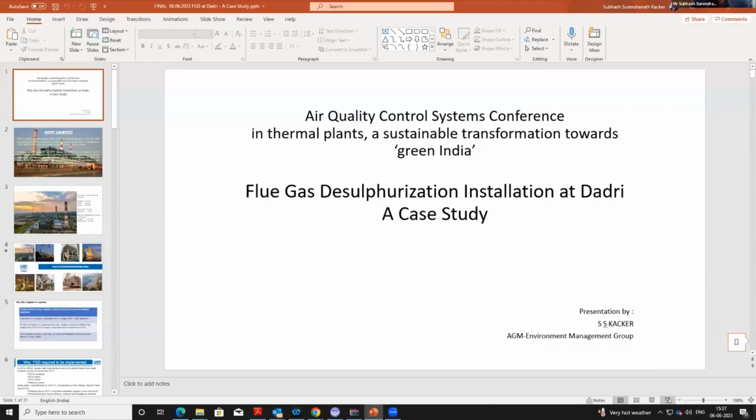Thank you, sir. Thank you, Tyagi sir. Thank you, Shreyal ji. I hope my presentation is visible to you. Yes, it's visible. You could go to slideshow mode. Perfect. So I'll talk about flue gas desulfurization installation at NTPC Dadri.

NTPC Limited is one of the largest power utilities in the country with an installed capacity of more than 72,000 megawatts, and it plans to become a 130 gigawatt company by the year 2032. It was established in 1975 and aims to be the world's largest and best power major.

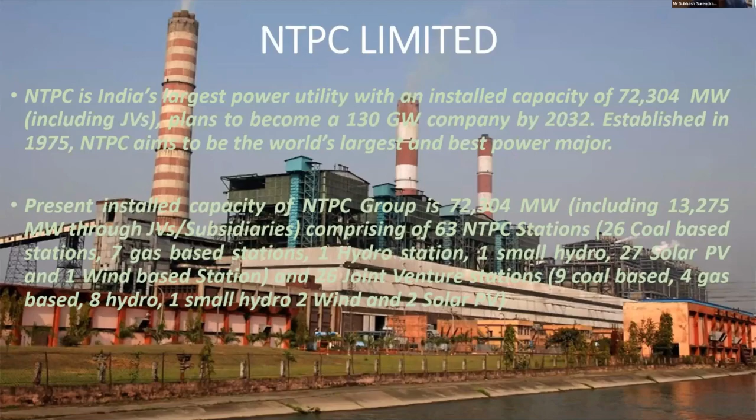As on date, the installed capacity of NTPC Group is 72,304 megawatt, including JVs and subsidiaries. We have 63 NTPC stations: 26 coal-based, 7 gas-based, 1 hydro, 1 small hydro, 27 solar and 1 wind-based station. We also have 26 joint venture stations: 9 coal-based, 8 hydro, 1 small hydro, 2 wind and 2 solar PV.

NTPC Dadri is a thermal station of 1820 megawatt, with stage 1 of 840 megawatt. This is the old station, commissioned in 1993. We have stage 2, with 2 units of 490 megawatt, total capacity 980 megawatt, commissioned in the year 2010.

We also have one gas plant with 4 gas turbines, total capacity of 829 megawatt, and solar PV of 5 megawatt. So Dadri is a unique station having thermal, gas and solar PV in one premises. Total ash generation is 24 lakh metric ton, fly ash is 19.2 lakh metric ton, and bottom ash is about 4.8 lakh metric ton.

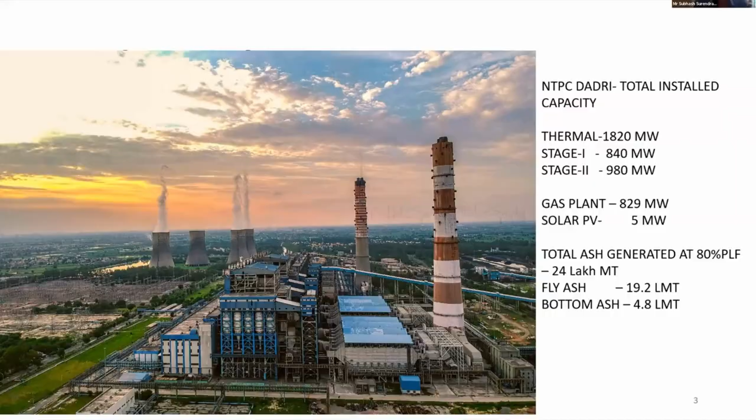So let's talk about flue gas desulfurization. Combustion of fuel having sulfur results in sulfur dioxide emission. Coal with 0.5% sulfur generates SOx in the range of 1500 to 2000 milligram per normal meter cube, with 95 to 96% of the sulfur converted into SO2. Indian coals have very low sulfur content, only 0.25 to 0.5%, while imported coal has more sulfur content, leading to more SOx generation. SO2 emission results in acid rain, corrosion of buildings and structures, and also affects human health.

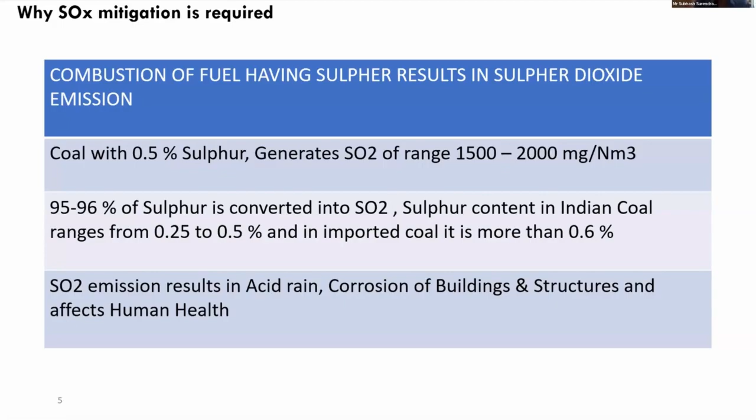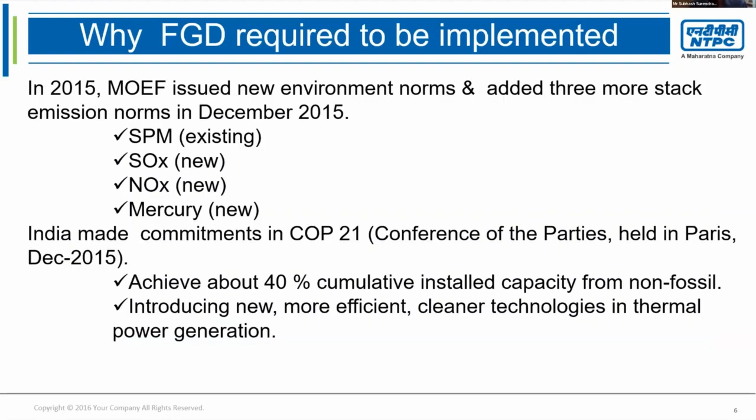In 2015, MOEF issued new environment norms and added 3 more emission norms in December 2015. India made commitments in COP21 in December 2015, wherein we said we will achieve 40% cumulative installed capacity from non-fossil fuels, introducing new, more efficient, cleaner technologies in power generation.

So regarding new stack emission norms: for stations installed prior to 31/12/2003, where NTPC stage 1 units fall in this category, the particulate matter limit is 100 milligram per normal meter cube, SOx is 600 milligram per normal meter cube, and NOx is 600 milligram per normal meter cube.

While for TPPs installed after 2003, where our stage 2 falls in this category, PM is 50 milligram per normal meter cube, SOx is 200 milligram per normal meter cube, and NOx is 300 milligram per normal meter cube.

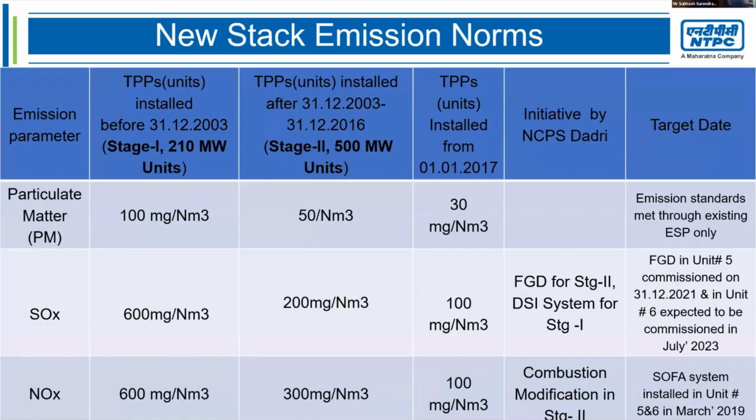For stage 1, we have installed DSI system, that is dry sorbent injection, and we have installed FGD for stage 2. For NOx control, we have gone for combustion modification in stage 2, wherein we installed the SOFA system in units 5 and 6 in March 2019. Dadri is the first plant of NTPC to implement DSI and FGD in a retrofit plant.

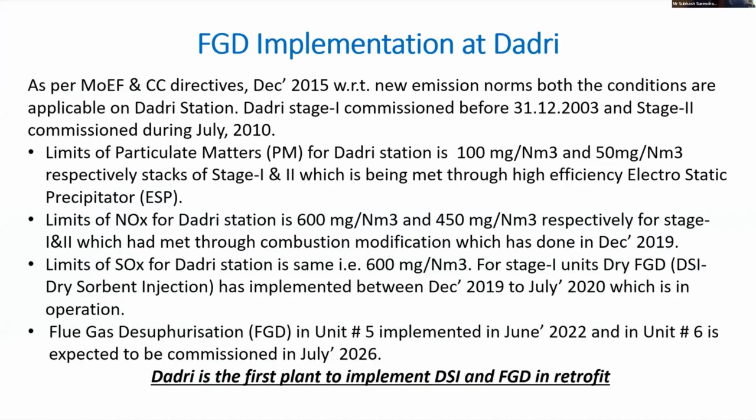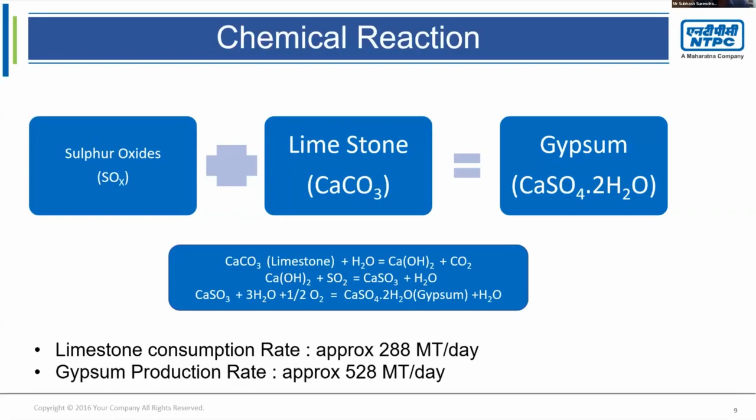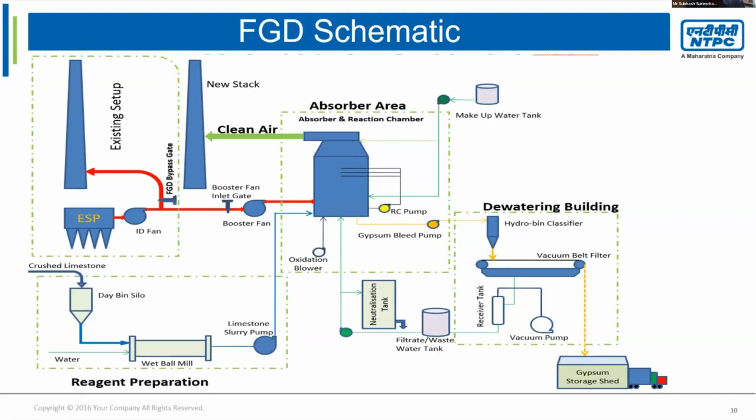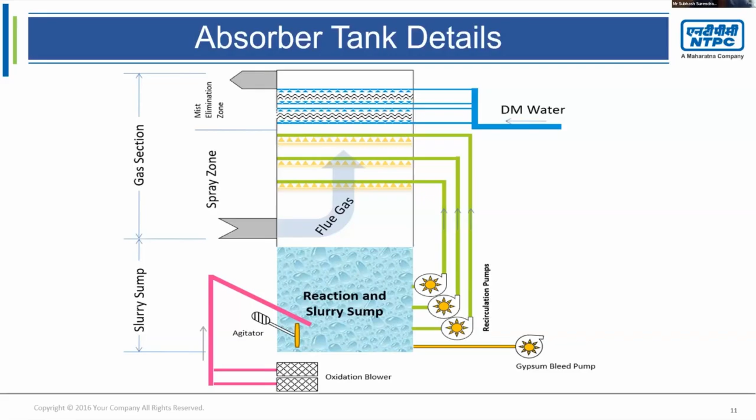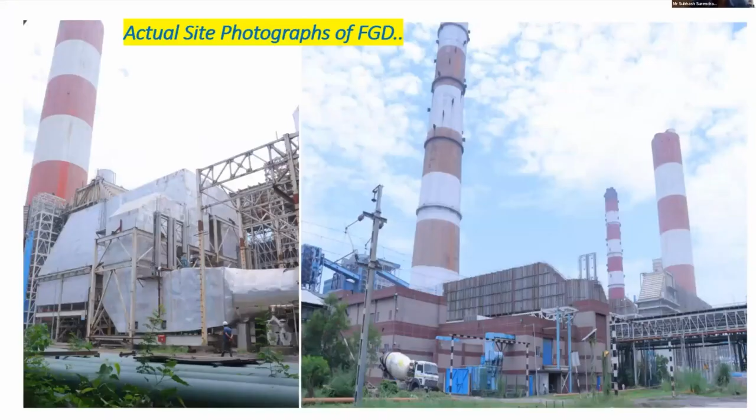This is an aerial view of the FGD. Earlier, we were having a high chimney. Now, with reduced emissions, the height of the new chimney has reduced. Though this is also a multi-flue chimney, the height has now reduced. This is the actual site photograph.

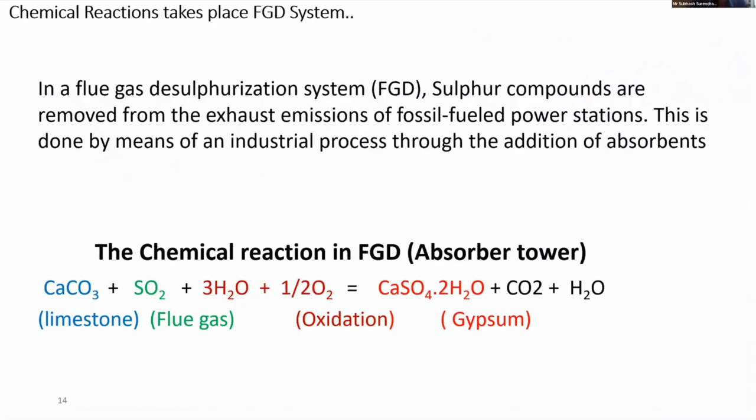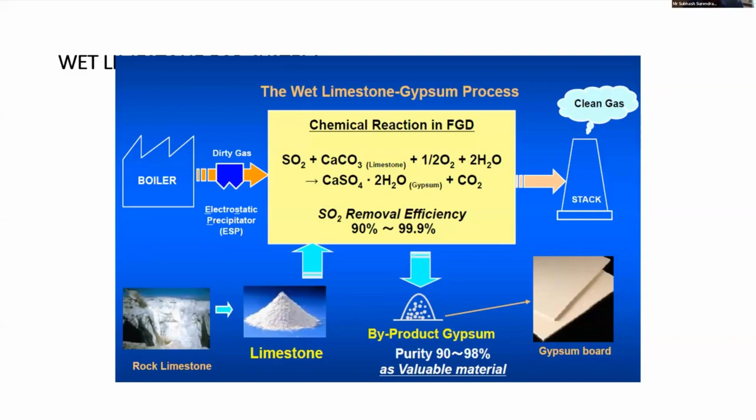Sulfur dioxide and limestone get converted to gypsum. This is the chemical reaction. Down below, again, we have shown the detailed chemical reactions which are occurring, and the limestone ultimately converts to gypsum in a series of 3 reactions.

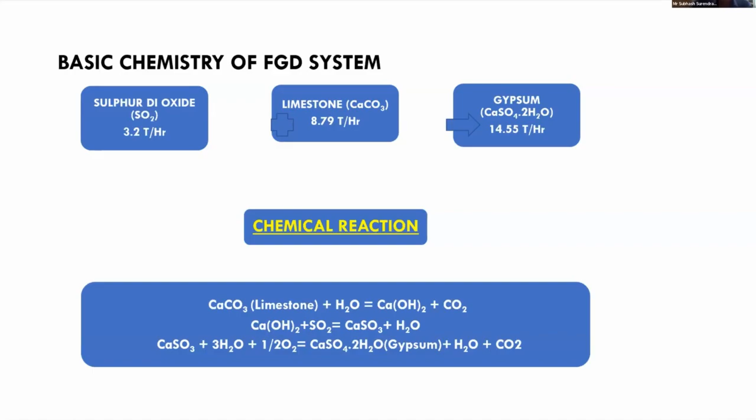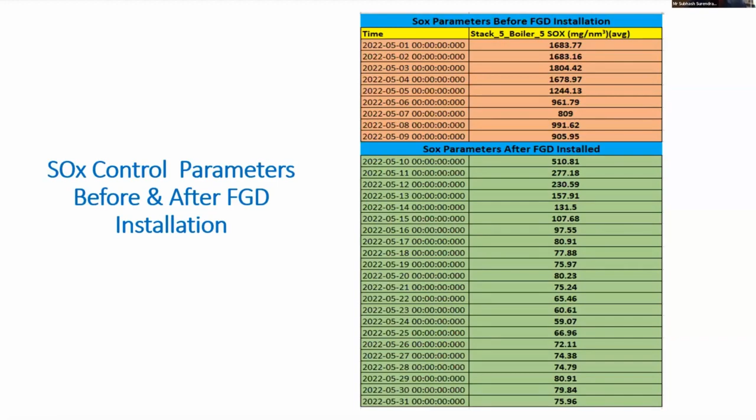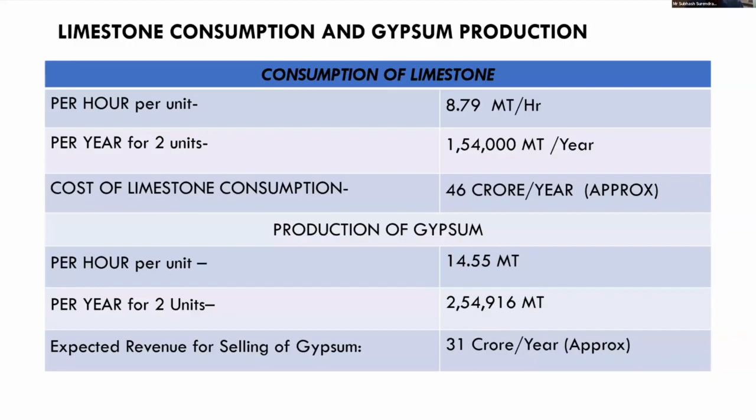Limestone consumption is about 8.79 metric tons per hour. For 2 units, the consumption will be 1,54,000 metric tons per year. Cost of limestone consumption will be about 46 crores per year, while the production of gypsum is about 14.5 metric tons. So for 2 units, since we have 2 500 megawatt units, we'll be installing this FGD for both. For one, it's already in service. For the other, it's likely to be in service in the next 1.5 months. Expected revenue for selling gypsum is approximately 31 crore per year.

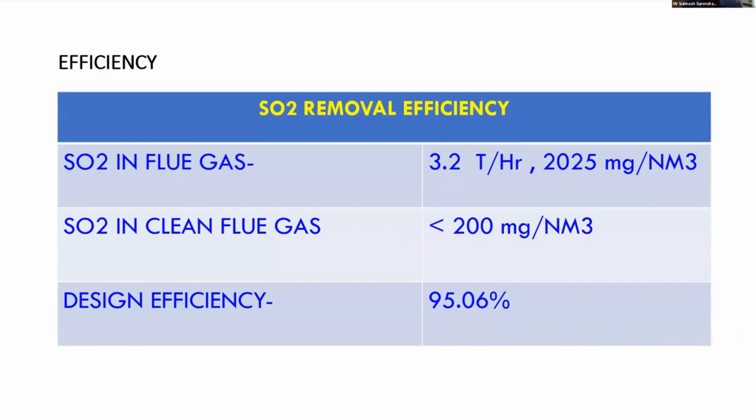SO2 in the flue gas will be 3.2 tons per hour. SO2 in the clean flue gas is less than 200 milligram per normal meter cube. Design efficiency is almost 95%.

Impact of installing FGD on the energy charge rate on Dadri is due to 1% increase in APC as per CEA recommendation, since some more drives are added on account of the FGD system. It is about 3.8 paisa per unit. Limestone consumption is 2.66 paisa. An increase in fixed charges due to increase in fixed cost on account of FGD is about 16 paisa per unit. So total, the financial implication of increase in ECR is something like 23 paisa per unit.

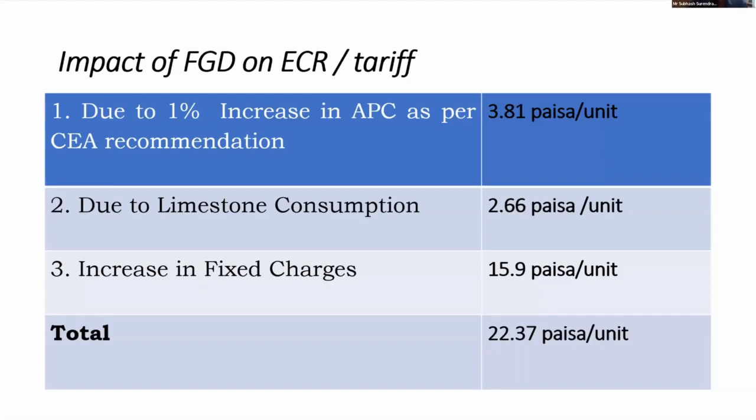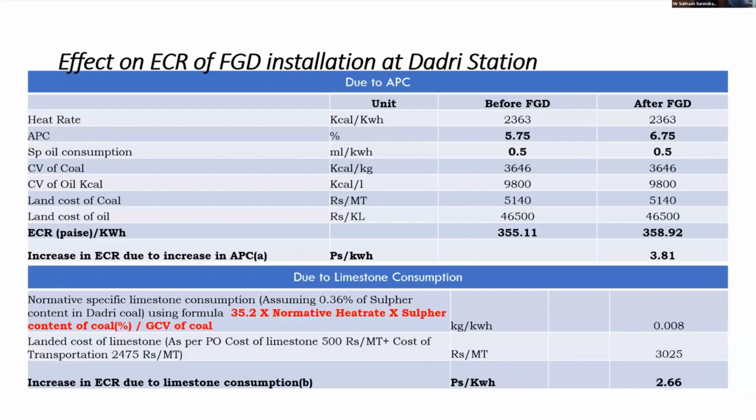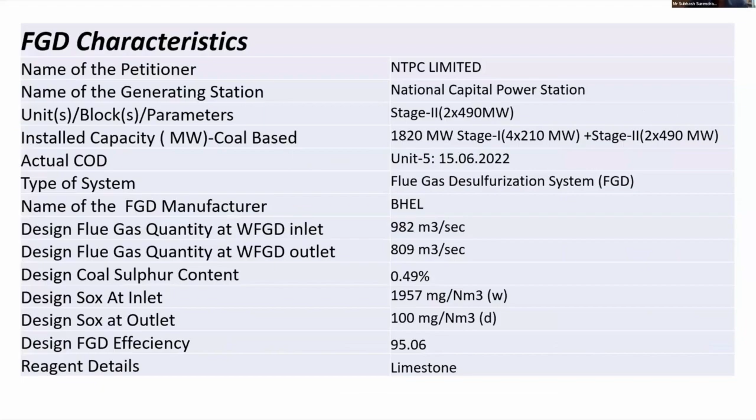These are the technical details of the FGD installed at NTPC Dadri.

The flue gas is drawn from the boiler into the FGD ductwork and forced into the absorber tower by booster fans. In the absorber, warm exhaust gases from the coal-fired boiler come into contact with limestone slurry, which is sprayed through nozzles using slurry recirculation pumps. When the warm gas comes into contact with the limestone slurry, a chemical reaction occurs between the sulfur dioxide in the gas and the limestone. This reaction removes the SO2 from the flue gases and converts the limestone into calcium sulfite.

The calcium sulfite further falls to the base of the absorber where compressed air is injected. The compressed air further oxidizes the calcium sulfite, converting it to calcium sulfate, commonly known as gypsum. This way, the reaction removes the sulfur dioxide from the flue gases.

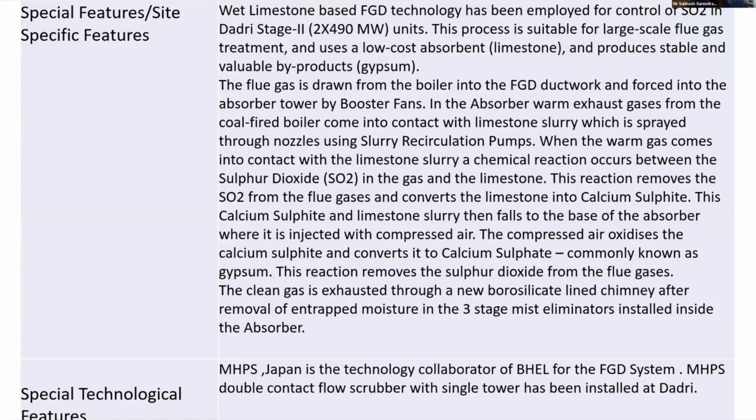MHPS Japan is the technology collaborator of BHEL for the FGD system. This FGD at Dadri is installed by BHEL. This is basically the mechanism, which is suitable for large scale flue gas treatment.

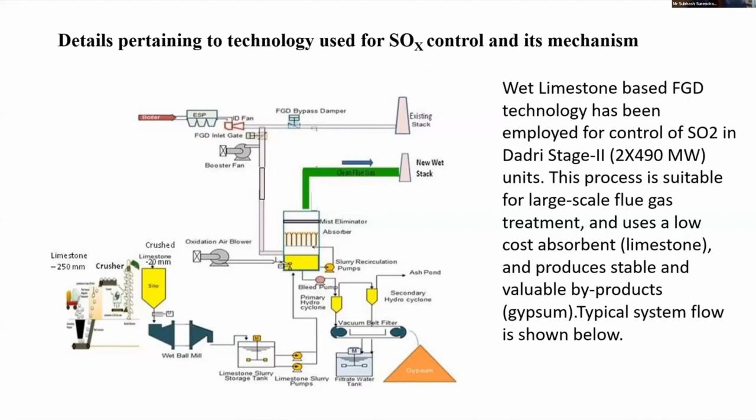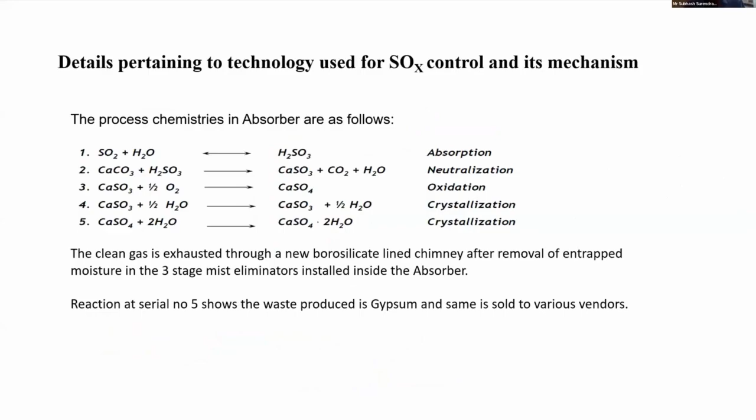We have given out 2 contracts for sale of gypsum. The first contract was for 20,000 metric ton, out of which we were able to sell 16,937 metric ton of gypsum. Thereafter, we gave a contract for 80,000 metric ton. We have 7 agencies which are lifting gypsum from NTPC Dadri, and till date we have been able to sell 4,972 metric ton out of this 80,000, and the total quantity lifted for the last year is 15,015 metric ton. So whatever gypsum we generated, we have been able to sell off.

Thank you, sir. Now, if anybody has any questions, I am open to questions.

Thank you very much for the excellent presentation. It was crisp and to the point within the allotted time. If anyone from the audience has a question, they may ask. There are 2 questions in the Q&A box. Yeah, I can read them.

First question: what is the height of FGD chimney and SO2 emission at present? Second question: final flue gas flow and temperature.